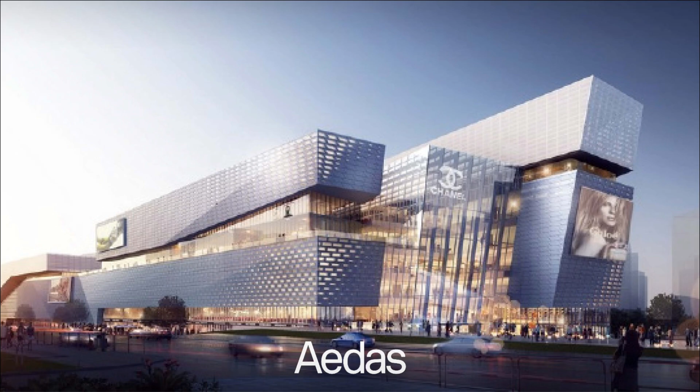I became sort of like the grasshopper guy on the team. I was always designing these facades and things like that. And it's really where I started to pick up technology when I was working in practice as a designer.

These things would get built really quickly, basically from the renders. So you'd be halfway through the project and they're actually building it. It's a very, very intense working environment.

I then got to a point where I was like, I'm designing these facades, but I don't know how they're actually made. And I joined a company called Front, also in Hong Kong, and eventually transitioned to their New York office. So I transitioned from Hong Kong to New York.

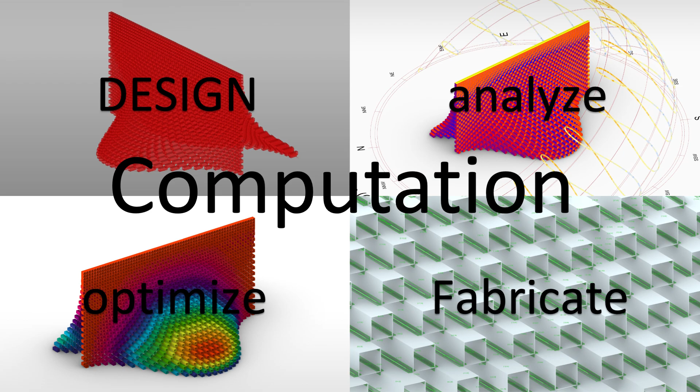Computation is, of course, incredibly important at BIG and in many architecture firms, from designing to analyzing your project to quantify that your design is actually performing, optimizing it. Sometimes, what if you take the Serpentine and you can only have 10 box lengths? And sometimes fabricate - it's not often, but sometimes as architects we would fabricate stuff.

We were also dealing with the immersive side, playing with game engines like Unreal, as well as the rise of real-time rendering and eventually D5 and things like that.

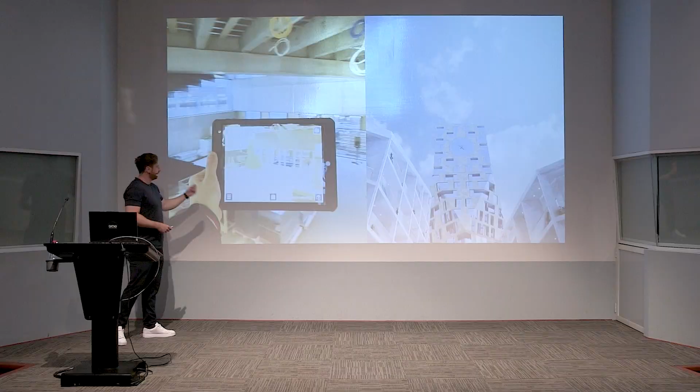Another area that I was really pushing was immersive design. So on the left, you got augmented reality, on the right, virtual reality. These were early experiments, which then evolved into real-world practice. So this is actually the headquarters in Copenhagen when it was being built, and we were using it to project what it's going to look like. And on the right was us presenting in virtual reality during COVID.

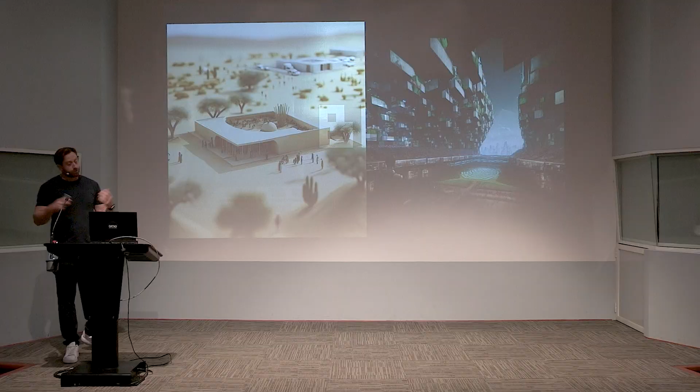And of course, the other big thing that I was spearheading at BIG was the rise of AI and this whole explosion of image generation and video and text and all this kind of stuff. As you can see, these images are super old. And so very quickly, we're experimenting with how do we integrate this into the actual design practice.

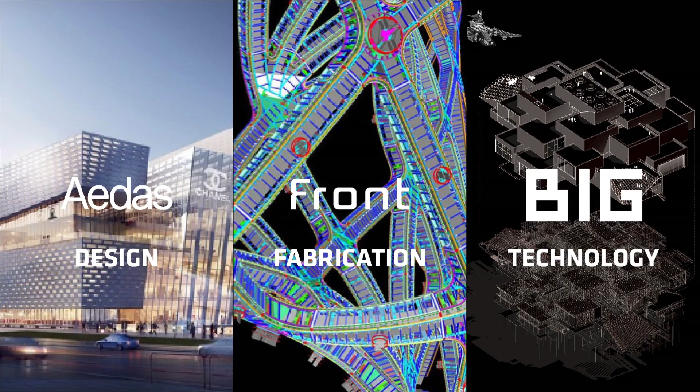So my professional background was this: I've always worked as an architect at these 3 different firms, but I always focused on a specialty, either as a designer, fabricating stuff, or as a technology specialist. Technology was always the core part of my career and my specialty, and also helped me get into some of these firms because I had a little technology superpower of some kind that helped me work as a specialist or get into different firms.

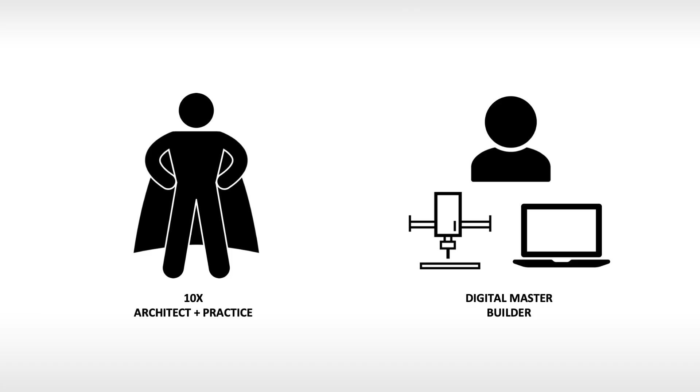And my background led me to these 2 interests I have right now. One is the idea of the 10x architect - you as young architects that are good designers, but also fluent in technology, can become significantly more productive than an architect that is not utilizing technology. I think we already have seen this in the early days from drafting to CAD, and now this is exploding as we transition from CAD to the AI collaborative era.

And the other area is this idea of the digital master builder. Because of technology, we as architects can get back to making. You guys probably have all used the laser cutter or the 3D printer to make models. Well, you can scale that up, and you can 3D print entire buildings now. Instead of laser cutting, you can CNC plywood out of wood and actually build houses with it. So you as architects can get back to being the full master builder from design to actual construction.

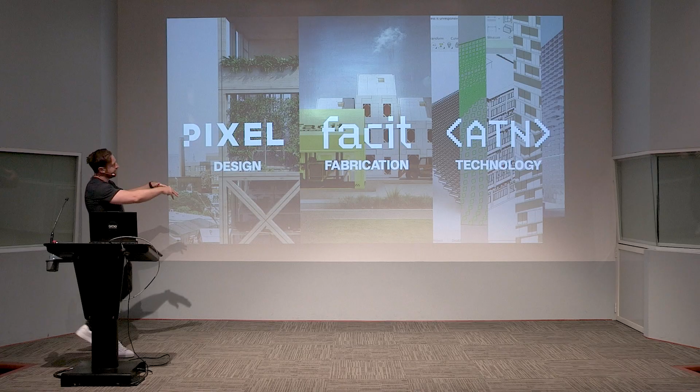Which means, one, you have more control of design, but two, you can actually make more money because you're doing the whole thing. The second part of my career is what I call the more entrepreneurial side, where I started to found my own businesses or work for startups. Pixel is an architecture practice I set up. Facit is a house building company, a startup I joined. And ATN is my online business where I teach people around technology. So again, there's always been this link between design, making, and technology or education.

So Pixel, I started a few years ago now, back in 2018. Notice I started Pixel whilst working at these companies. Sometimes starting little businesses, if you can do it with their permission, is important, can be a great way to start a business because you actually have the security of having a job, but you have the freedom to experiment with doing competitions or taking on little projects on the side. So a lot of people say this idea that you just quit your job and start a company. Most of the time, people that do that, it doesn't work because you suddenly have no money, and you have to quickly work out how to make the business work. So definitely creating something whilst you're working can be a really good strategy.

Pixel was an architecture practice. It was just me and my friends working on competitions. We got close to winning some.

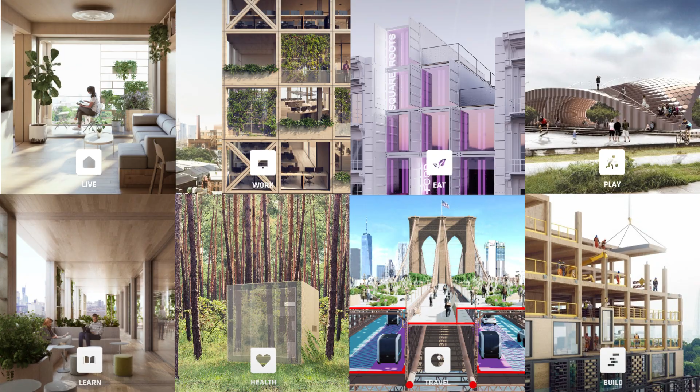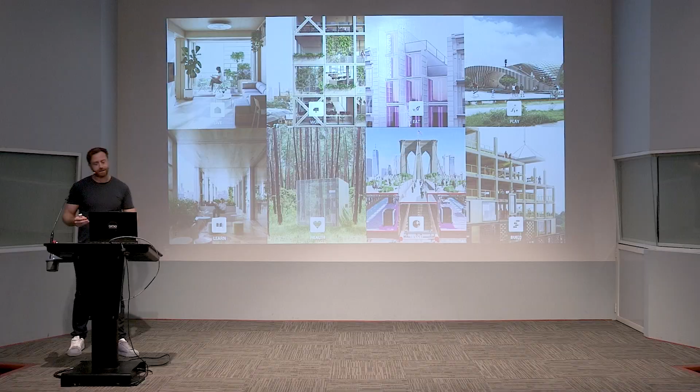We landed some real projects and real clients, and we kept doing these projects over and over. We had a real interest in working on projects that positively impacted the future. So instead of thinking of it like retail or commercial or office, we think about how we can improve live, work, eat, play, building, learning through architecture. We worked on all these different competitions, from office buildings to taking projects to Burning Man to housing, train stations—whatever competition we could find that was interesting and felt like it fit, we would work on.

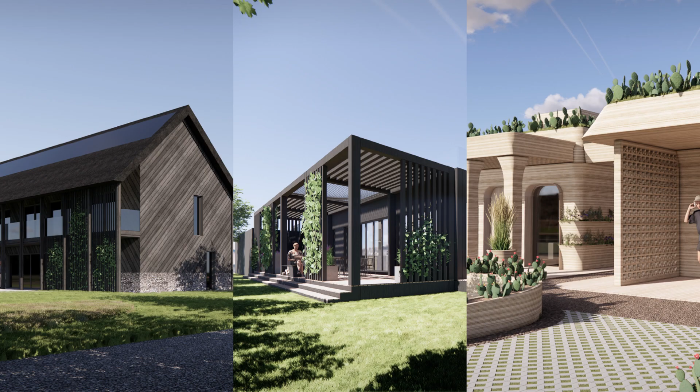This led me to start honing in on the world of housing. I found there was loads of opportunity to create sustainable housing using technology that actually increases our way of life rather than decreasing it.

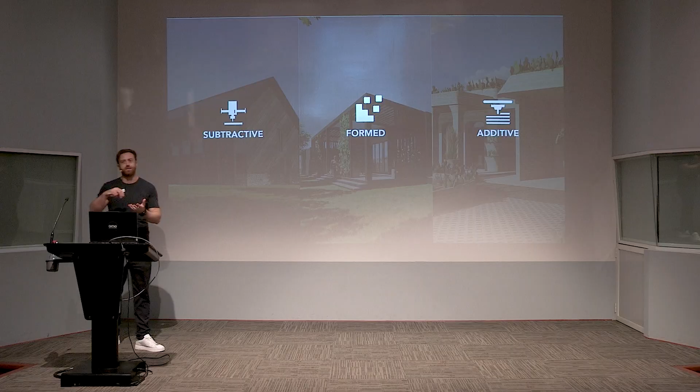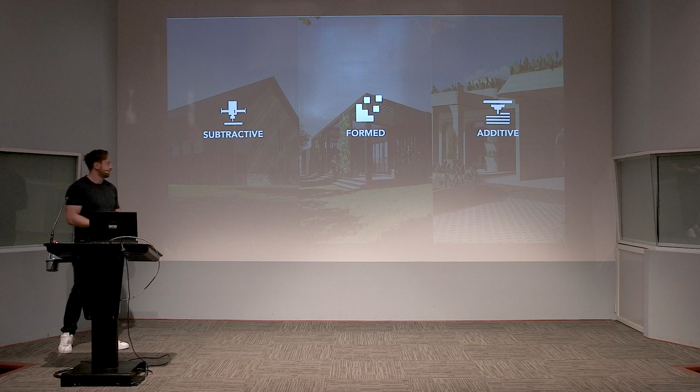So I started to gravitate towards what's called MMC, modern methods of construction—essentially new ways that we can build. You can think of those in categories of subtractive, formed, and additive. Subtractive is when you take a material and use a robot or a CNC machine, some piece of technology you can control, like a CNC machine and plywood. Formed is when you cut the material away and use it to create forms of concrete—so precast concrete. Here in Guatemala, you have a lot of concrete. Or additive, which is where you 3D print entire structures.

And so we started to work on projects like this. This was where we were designing a kind of prefabricated building system in the UK that could be repeatable, yet adapt to the different areas, because we have very different styles of houses in different areas of the UK. These houses are all built from timber.

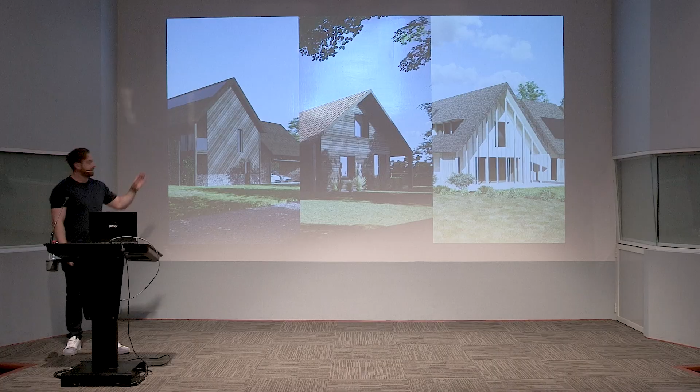They're also made from hemp, which is like a weed plant. It doesn't get you high, but it absorbs CO2 very quickly, and you can actually use it. So with all the houses, we're trying to use local or bio-based materials.

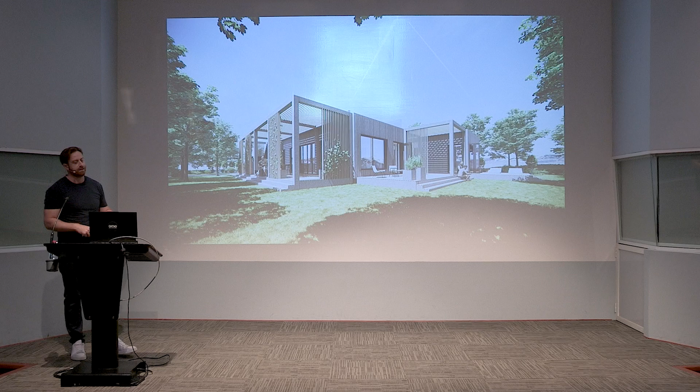Another project we worked on was a modular precast system in Bulgaria, where they had quite an ugly building system, but through the use of parametrics, we could create a building configurator. Using a very small number of parts, we could create a house that could take many, many different forms, so that the families inside it can design the houses around them, and not the other way around.

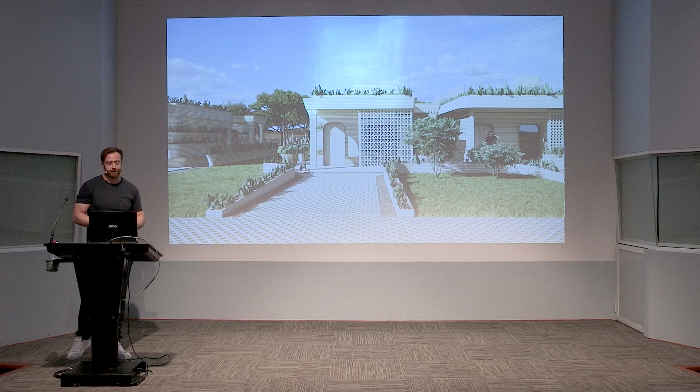Finally, we also worked on competitions with Icon, a 3D printing company based in Texas, to build a house for $99,000. Of course, the beauty with 3D printing is every single house can be unique. So it was again the idea of what if the users themselves can actually create their own house—a bit like everyone's played Sims and created their own house in Sims.

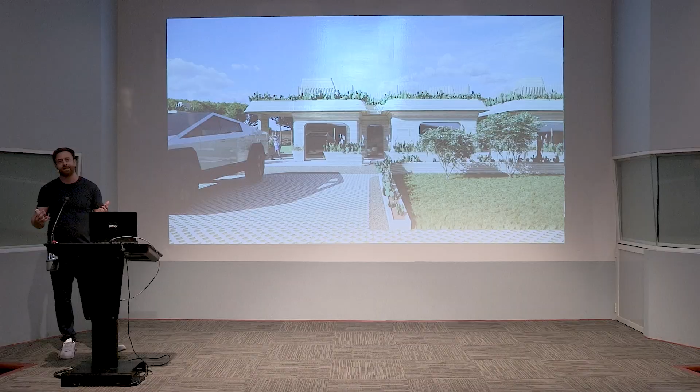Maybe you guys are too young to play Sims, I'm not sure, but everyone has played Sims and wants to design their own house. So this is the idea of what if you can actually configure your own house.

This interest in housing and using technology to build houses led me to join a startup company called Facit, where we were trying to become a tech-enabled home builder. Facit is quite a unique company. I joined them not so long ago, about a year and a half ago, in 2024. I left BIG and joined Facit.

Essentially, they're a company that rethinks how we build homes. So we think of homes as a product, a bit like your phone here. Your iPhone or your phone that you have in your pocket is a product, and every year they release a new one, and it gets better and better, supposedly, with iPhones. So we also want to think of the house like a product, right?

But not a product where you just copy and paste the same house over and over again—rather, the house is made up of the same parts over and over again. So the same foundations, the same roofing, windows, doors, all tied together in what's called the Facit chassis, which is the timber superstructure that we build from a CNC machine out of these little Lego blocks.

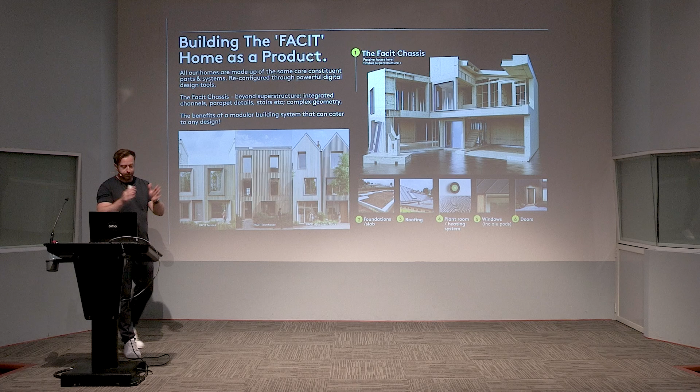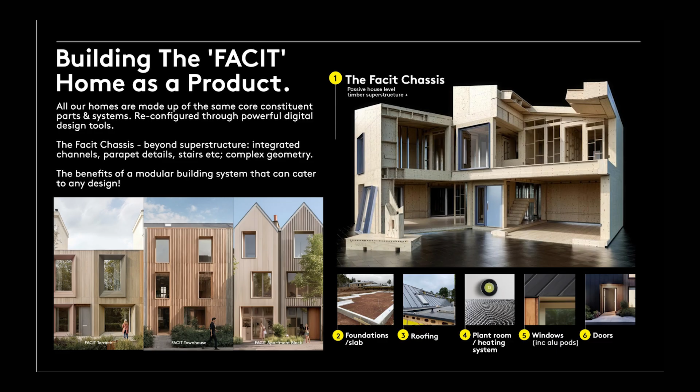So we cut plywood, and then we build them into boxes, and then we build the houses out of these basically little Lego boxes. It means every single house can be unique, but it's made using the same system. So you know how it's going to get built, you know how it's going to get costed, and you have freedom as a designer, but you have the efficiencies of a modular house. Of course, we also modeled the house down to the nuts and bolts in BIM, and that way we know exactly how many sheets of plywood it would take.

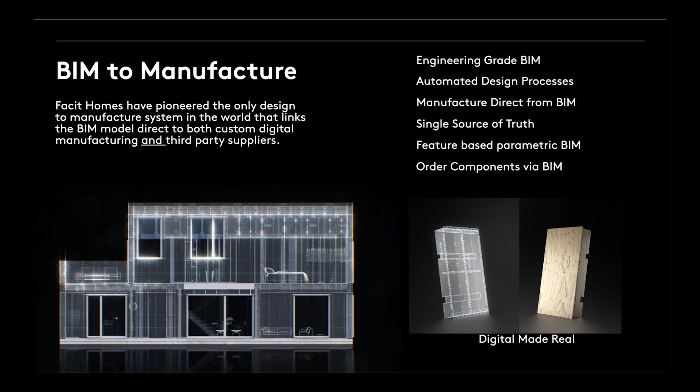We would know exactly how many bolts are in the building, which means we could actually cost the house to a very, very high accuracy. You guys may be unfamiliar with this, but when you go and design a building, you don't really know how much it's going to cost until you've basically finished it, right? Which is kind of crazy. But with Facit, we know exactly how much it's going to get built.

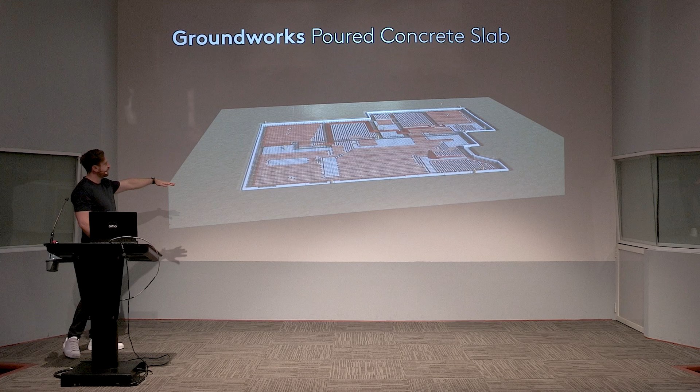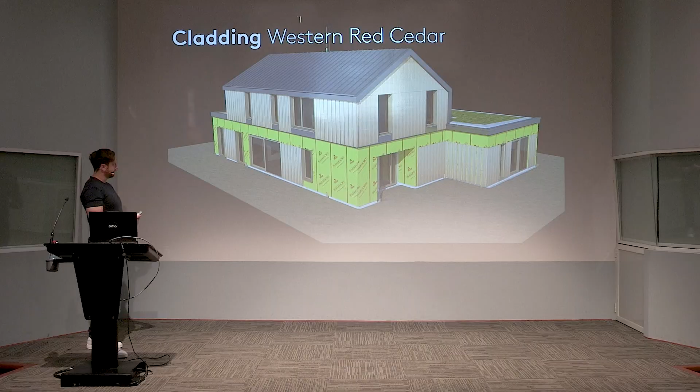This is basically the way that we built. We had a modular building system. Even the foundations are modular. We use a little bit of concrete. All the little Lego blocks of plywood come into place, and we can make any shape of home. The waterproofing goes in, the windows that we use every single time goes in, and essentially the cladding can be anything in the local area so we can fit in.

And with this methodology, we could build the most sustainable homes in the UK. We could build faster than traditional construction, and often we would build cheaper than a traditional builder building to the same level of specification.

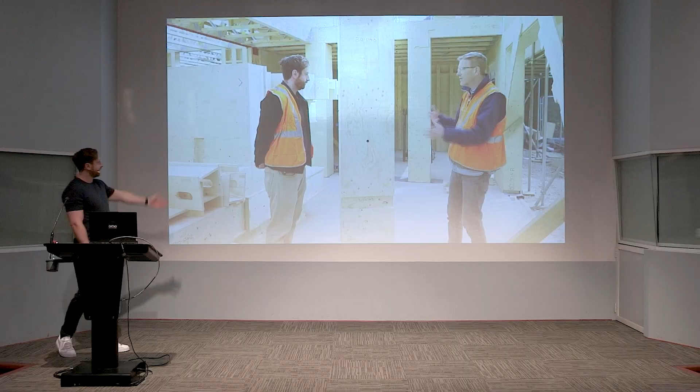And so we were also a true master builder - we were architects that were designing, manufacturing, and building. Our design process would start as a sketch. We'd design it, model it in Revit, demolish the building, do the foundations, cut out the pieces, and actually build it block by block to the end. You can actually go and check out the YouTube channel where you can go through the entire process of the building.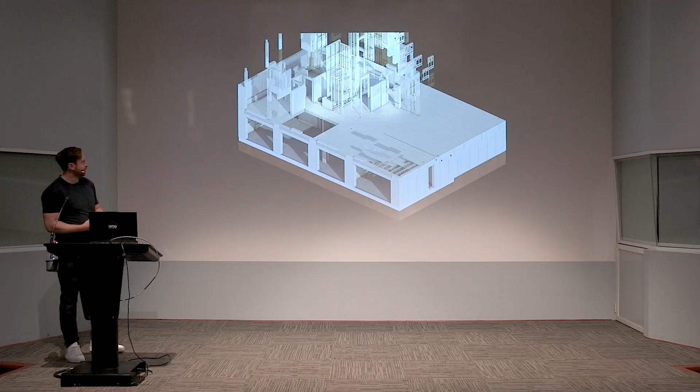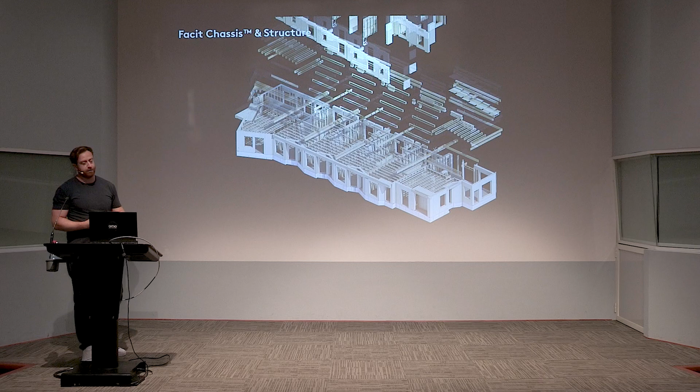Essentially, I joined to help them scale up this idea from single houses. So the company for many years had been building houses just for single, expensive eco-homes, and developed the technology which we were then scaling up to deliver and tackle housing on a much larger scale - going from single houses to multi-unit schemes. In the UK that's like little townhouses, apartment blocks, where we can really deliver housing to a much larger scale. So it's the same building system, the same methodology, the same technology, but just applied on a much bigger scale.

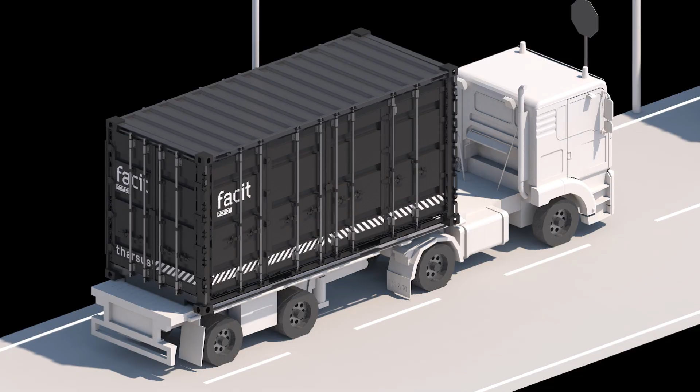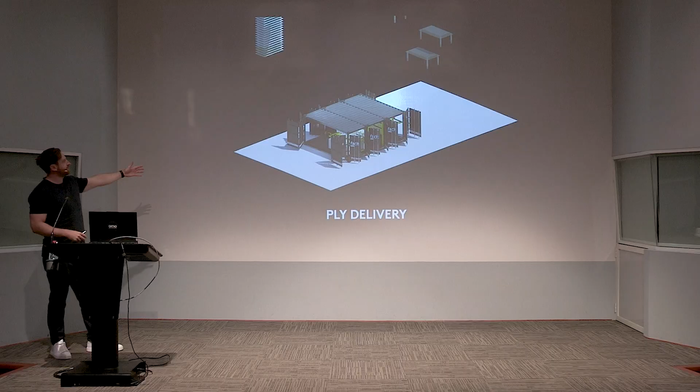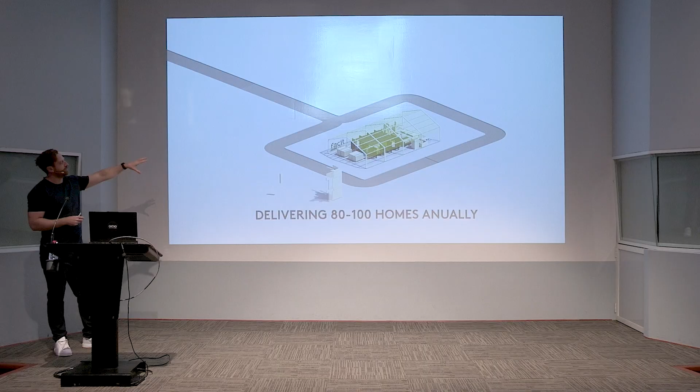We also developed a new microfactory. So instead of one container, we developed a 3-container system. Same idea though - materials go in one side, they go through the more automated machine, out comes the components, which you can put into the Lego blocks, and then you can also join the Lego blocks into entire walls or floors and assemble the building really quickly. The key advantage we had is we can fit our microfactories on the building site, so you don't have to pay for another factory. You can bring it with you and build directly on the construction site.

This was the new machine. In the middle is still the CNC machine, but we made all this automation around it. We had robots that would put the materials on, a 2D print system so we can actually put instructions on the components, the CNC machine still in the middle, and then a material loading and unloading system, so that the machine can basically run without people overnight, and you can come in and start making the components.

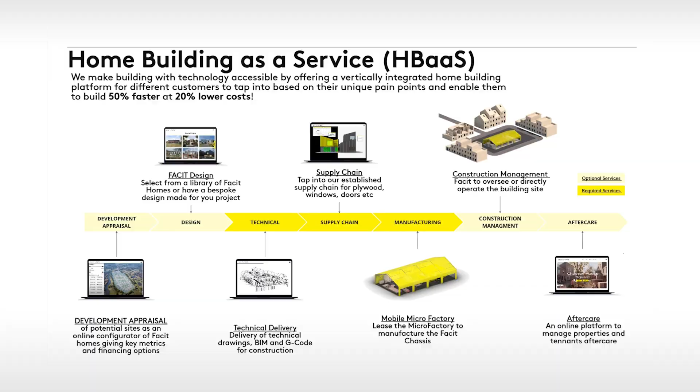And so we were basically offering a new model for housing called home building as a service, where we would offer developers an entire end-to-end process from looking at the initial development, doing the design, building it, and even helping them sell the homes. Our goal was to build houses like this, which were beautiful, fit into the local context, but highly sustainable and highly performative, right?

So this is really high quality, sustainable living in the UK. And then finally, Architect Network, which I started around 5 years ago, again whilst I was working at BIG. This was something that started off small and grew from there.

We're a platform that really talks about architecture and technology, and our goal is to share knowledge around this topic. We started it because even working at BIG, we would see graduates come in and still need a little bit of training, whether it's BIM or Rhino or computation. So I just started to make the same material I would use to train people inside BIG, and make it publicly accessible on YouTube or through our website.

And we share knowledge in 4 key ways. We have a podcast, our YouTube channel, online courses, and events.

Our podcast started really small on an app called Clubhouse. You may remember that from COVID. It was a pretty wild app. It's grown into a more YouTube-style podcast where we invite guests to talk about some kind of architecture and technology. I think you guys know Oliver and Stephen from last year. It's a very small world that we all know each other.

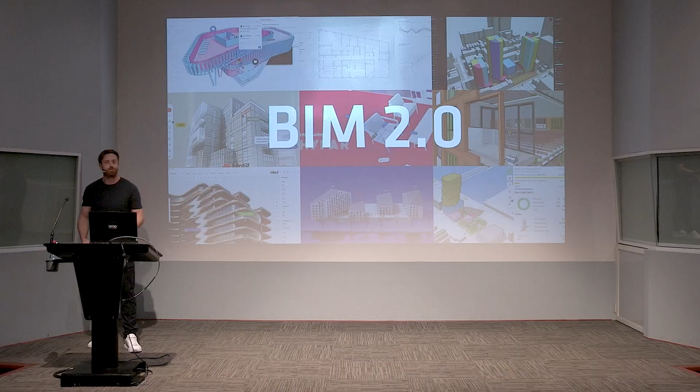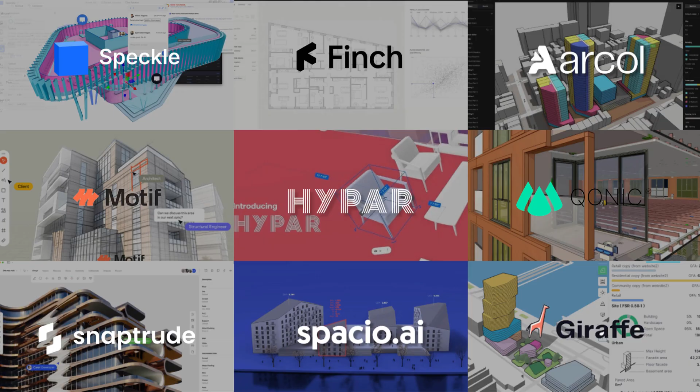And we as architects are demanding a newer platform, a better generation of BIM. And so from that, all these startups emerged. And now there's more than 9 companies, actually 10 or 15 now, all kind of reinventing BIM in this new era of a platform.

If you look at other industries like product design, they typically have one software where they design, document, even manufacture from, and visualize all in one software. This is sort of what these guys are trying to do. They're all little babies at the moment, but they might grow into something quite big. So I wouldn't necessarily recommend learning these right now, but it's worth following them and seeing how they develop.

One of these will become the next Revit. Some will die, some will join together. But yeah, at the moment, all of them are either trying to be broad, trying to be the next Revit, like one platform where you design in this space, or they're trying to be narrow, trying to do a specific thing, like just floor plan automations or floor plan layouts.

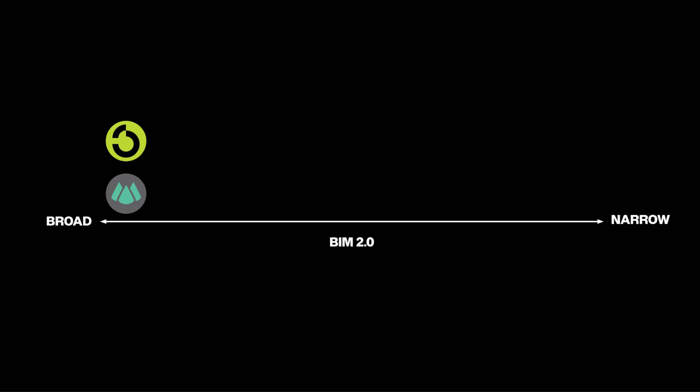So at the broad end of the spectrum, you've got a company called Qonic, also called the Open BIM company. Qonic is basically a platform where you can load the whole city, even your model, all the way down to the nuts and bolts. It's much more intuitive, a bit more like SketchUp in terms of modeling. You can model an entire building and zoom in all the way to the little sprinkler, and zoom out to the entire city.

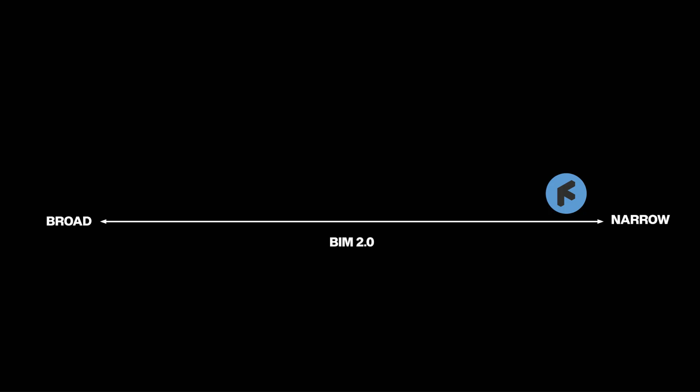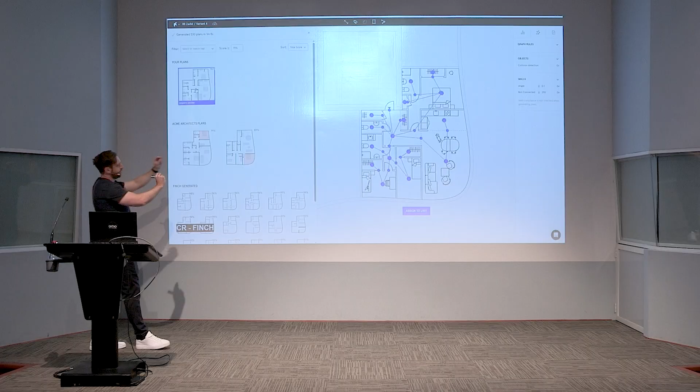Another that's more narrow, doing a very specific job, is called Finch. Finch is trying to use computation and AI to automate laying out plans. It actually learns from your plans in different ways, and can feed you initial designs, then you give it back your own designs. It starts to learn, and can produce pretty good layouts for apartments and things like that pretty quickly. It uses a system called graph mapping, basically an algorithm that measures the distance between different rooms and works out the connections between them.

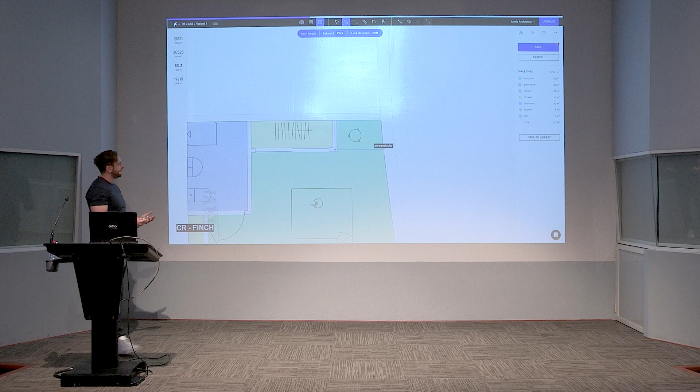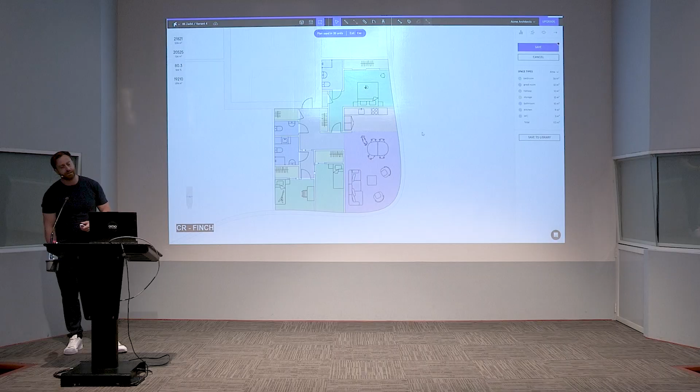It's basically like a plugin where you can generate it, but you can also customize it and add manual touches to things. This is really important because this idea that the computer will just generate something for you is kind of false. We always want to be designing with the computer, not the computer designing for us.

Next we've got a group here, Snaptrude, Arcol, and Giraffe, that want to get to that broad platform, but they're initially focusing on feasibility, the very early stages. So you have a site, you quickly put a building on it, you put program on it. You can even have this little chatbot AI thing that helps you go through the program and work out areas, and helps you model a little bit. It's much more intuitive, and it's also on the web, so you access this on the internet.

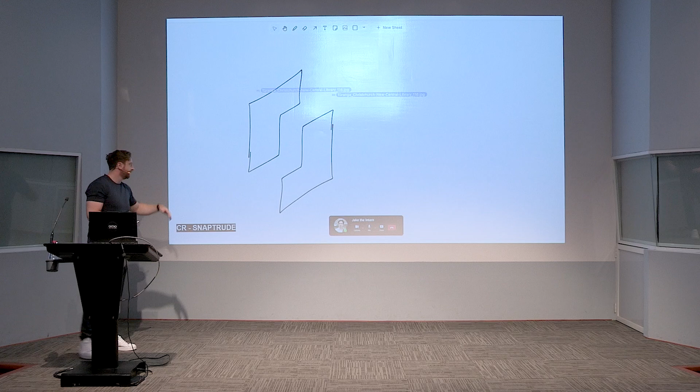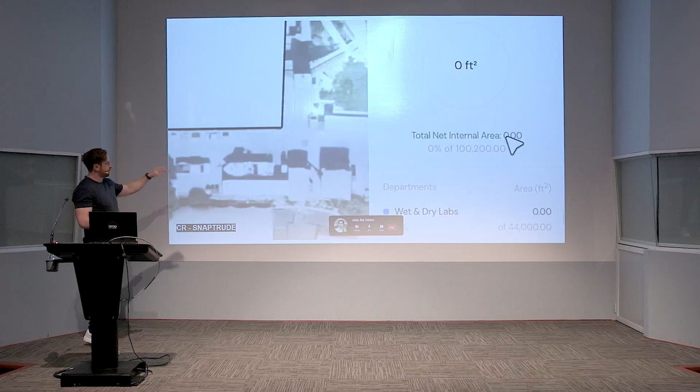You can go all the way from drawing to actually modeling a full project. It's also kind of very Miro inspired, so everyone is working in one environment at the same time, and you can go from site, and it can do all the program for you and model extremely quickly.

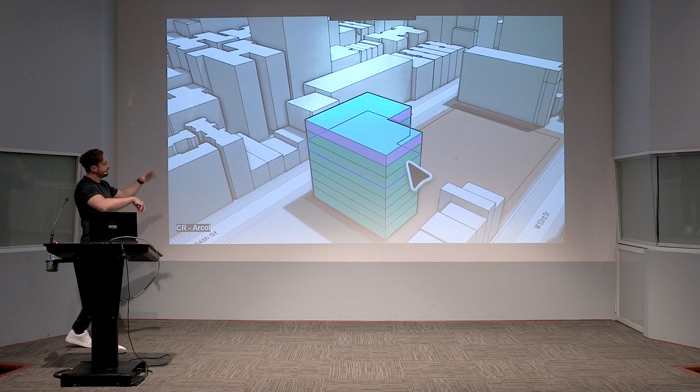Arcol is another one that's also quite similar. You can model a mass, give it different programs, and then very quickly go from the model to putting it onto sheets where you can present something to the client. All of these are trying to get that really early stage really quickly. Giraffe is another one where you go online, find your site, quickly draw what you want to do, and it's basically using a bunch of Grasshopper scripts in the background to help you get there a lot faster.

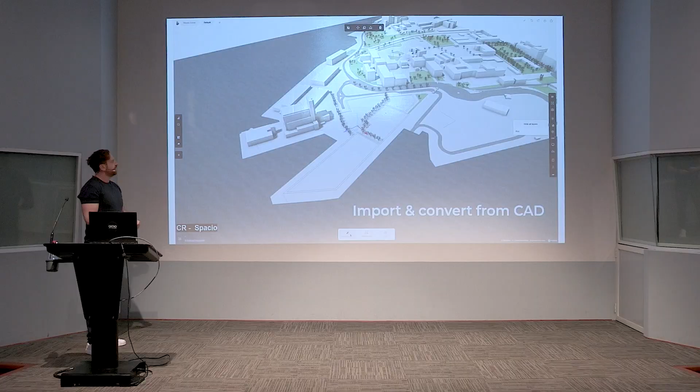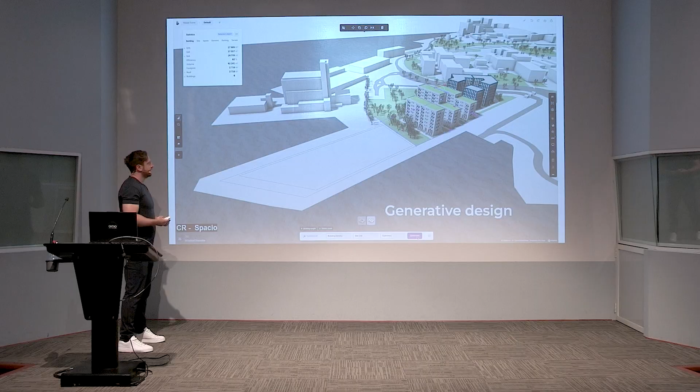Then the next ones are kind of along this spectrum, all somewhere here, but trying to get to become a broad platform. Spacio is a new one as well, probably the most beautiful one, where again you find a site, you can analyze it really quickly, generate an initial design, and quickly work out how much massing you can put on your building.

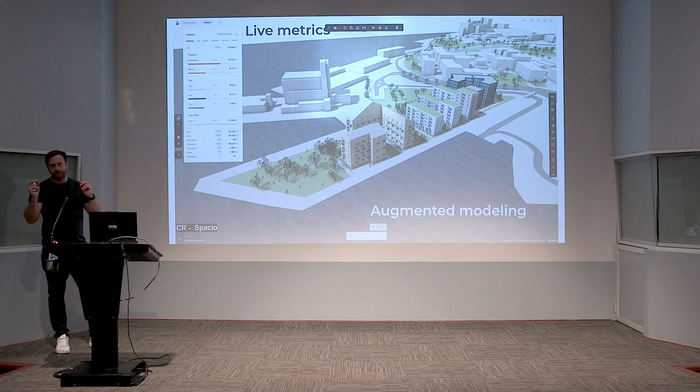It's a bit more beautiful in terms of the design as well. It generates something, but you can also manually edit it, and create your own scripts to create your own buildings. Again, it's very early stage, maybe working with the developer to know exactly what you can fit on your site.

Of course, Autodesk have their own products. This is called Forma, where again they are trying to create their own version of this, where you go on the sites, generate your own massing model, do environmental performance, give a massing and quickly analyze daylight analysis, zoning, wind analysis, and all this kind of stuff.

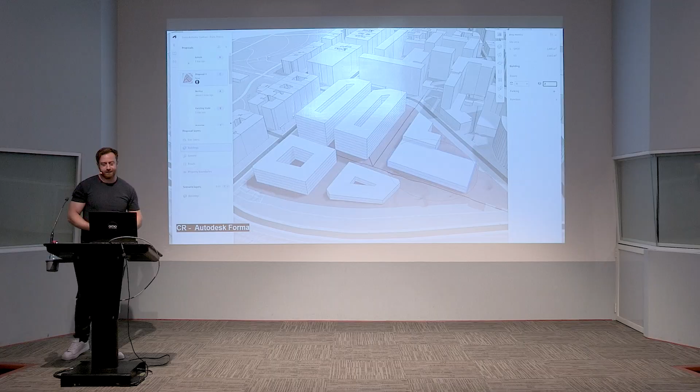And this is free, so if you have an Autodesk license, you can test this out today. As students, you should have this and you can try it out.

Motif, this is one of the big new ones. They have a lot of funding from Silicon Valley, and essentially right now they're trying to build the Miro for the architecture space. So you guys can all be in one space, referencing your BIM model, creating images, using AI to render it, collaborate together, make presentations. And this will eventually grow into a platform where you can actually model in the cloud, online, and work on things in a much smoother way.

And then finally, you've also got one called Hypar, which is a bit more narrow, and they're specifically trying to do floor plan layout or floor plan generation. So you can quickly go from modeling rooms to putting your whole building together really quickly. It's very good at automating space planning layouts, for conference rooms and all this kind of stuff.

So there's all these companies now trying to create the next generation of BIM. It's all quite interesting, it's all quite exciting, but it's all quite new. As students, I wouldn't say you have to learn any of these softwares, it's too early, but it's definitely worth knowing that they exist and following them.

And this is called the BIM 2.0 era. A few thoughts on where this is going: first of all, BIM 2.0 is really hard, it's really expensive to do this. So these are little babies that will take time to grow into the next Revit.

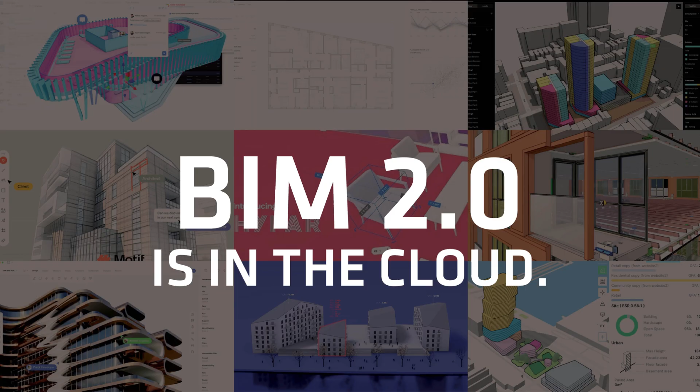All of these are in the cloud, so it's like working in Google Sheets or Miro. Everyone is working on the same thing, hence why it's extremely collaborative—you're all working on the same project at the same time, can see your colleagues moving things. There is an obsession with becoming the next Figma or Miro of the AEC space, where everyone is collaborating in the cloud.

And it's all integrated with AI, so all of them are using AI in some way, even as a little sidekick or trying to generate the entire building. If you want to find out more, you can see on our YouTube channel, there's a whole video on BIM 2.0.

And the other thing that's really hot right now is, of course, AI. How many of you guys are using AI in some way—image generation or ChatGPT? Put your hands. Good, you should definitely be embracing the world of AI.

We're in a really exciting time, there's been this rise of AI. I started this a while ago when I was at BIG, when it first came around, and it's a way of looking all the way from the beginning of a project to documentation—a simplified design process of what AI can really significantly do or significantly help us with in the design process.

So at the beginning, you could give ChatGPT your brief, you could dissect the program, you could get it to come up with your idea and narrative really quickly. You could then use that to create a prompt for the image, or generate the prompt directly, and sell the idea of the project. You could turn that into a video to sell the story of a project and sell that to a client.

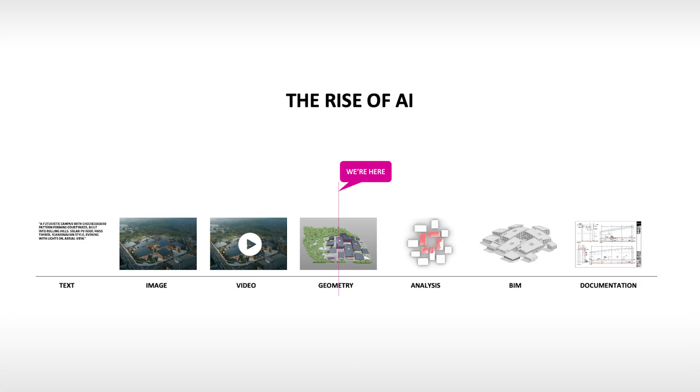The way I see architects using AI when we go around to all these different firms and in the industry is split into two sides. One is the process side, using LLMs like ChatGPT or Claude or Grok to streamline the more boring side of what we do—that could be as simple as using ChatGPT to reply to emails, or generating reports that you needed to do.

And it's really about simplifying the boring stuff so we can spend more time actually designing and making the project better. The other side is, of course, the creative side, the side of image generation, video generation, and the more fun, playful stuff.

In terms of LLMs, like ChatGPT, all firms are now building their own trained LLMs in their specific area. So Foster's and Partners have their own one, Heatherwick, Zaha, Big. It's simply just a way to create a repository of all the data inside that office - like how many hotels have we designed, what's the standard GFA for an office building that we've designed. It's really about having a place where you can access all the knowledge of the firm.

Image generation - there are of course many people using different image generators, but I still see Midjourney as the place where people go to create the initial idea for architects. It's still the most creative, the most high-end, at least for creating the essence of the idea. And it's become quite powerful as a way to quickly hone in on the design with a client, so you can very quickly feel out what the client is looking for by giving them these little flavors of the direction we could go in. It's really saving time on dead design options that you think won't necessarily work.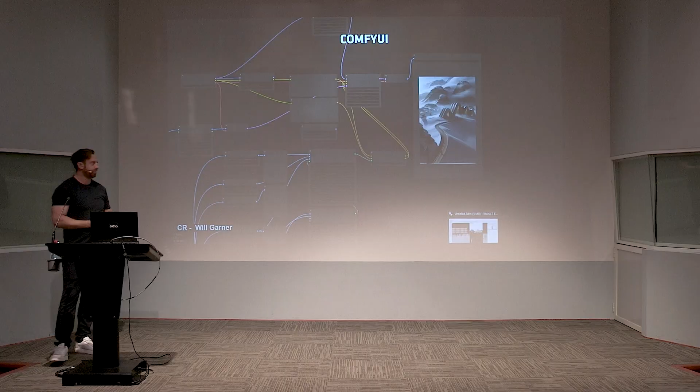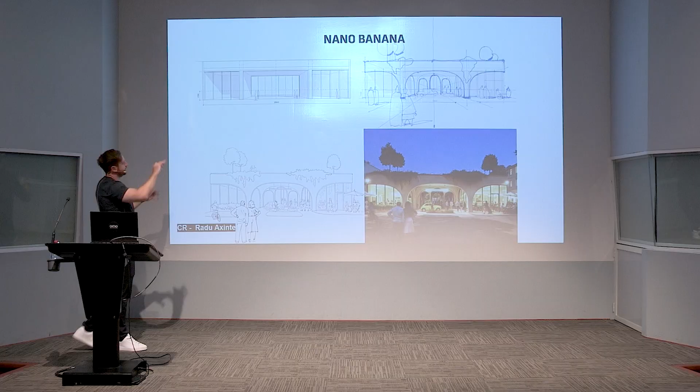And more recently, this has also evolved with Nano Banana - a product from Google. If you go on Google's Gemini, you can directly use Nano Banana. You can see architects - each one of these pieces of work is referencing an architect, with their name in the bottom left corner. Radu is actually from Heatherwick Studio, and this is a really beautiful example of the power of AI. He's created a model, so he's got an actual reference for the space, so it's accurate.

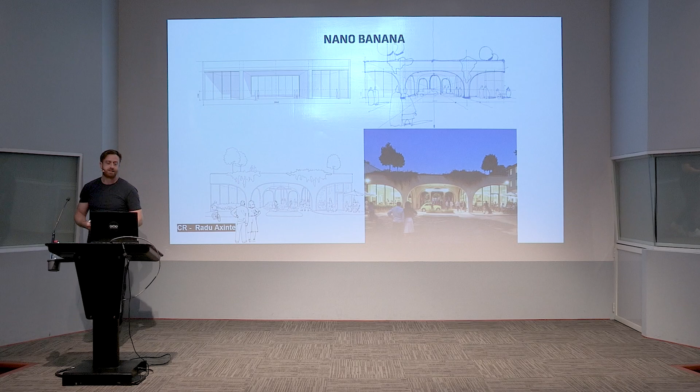Sketching over it - sketching is becoming a really powerful skill, because from a sketch you can create the outline, and then use the outline to create a high-end render. I think this is where it's getting really exciting. Bringing back hand drawing allows you to go from concept to render extremely quickly now, so you can spend more time thinking through the actual idea.

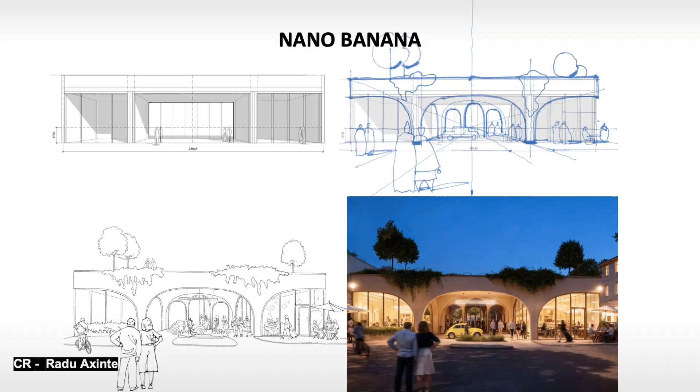Another architect called Tim Fu - they are actually using text to video to create fully animated videos to sell their ideas. A lot of small architecture studios are now offering visualization services using AI, and through video, they're really able to sell the entire story and also sell a new service. So instead of going to a rendering company, you can now go to your architecture firm.

This explosion in AI imagery and video has also given rise to an explosion in social media. I think the one place we have seen AI disrupt the industry is actually in social media, because before, if you had to create projects to put on Instagram, you're supposed to post every single day to grow. But that's very hard when you're designing - if you design a project, create a render, even if you're very fast, it would take weeks or months. Now with AI, that takes hours or days. So suddenly architects could just feed Instagram with loads of images, and there's this explosion in online architects and architecture profiles, which means you could market your ideas much faster.

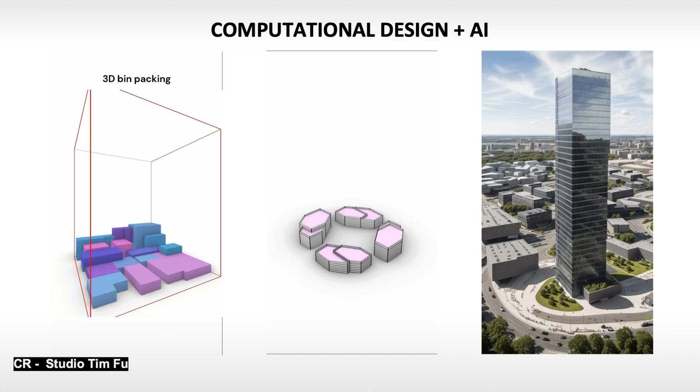Again, from Studio Tim Fu, there's people combining computational design with AI. But don't get this confused—this is not AI writing the scripts. The scripts are just Grasshopper scripts. All AI does is visualize using AI, so the process from concept to the actual end image is just getting much shorter. But you still have that combination of computational skill and AI skill.

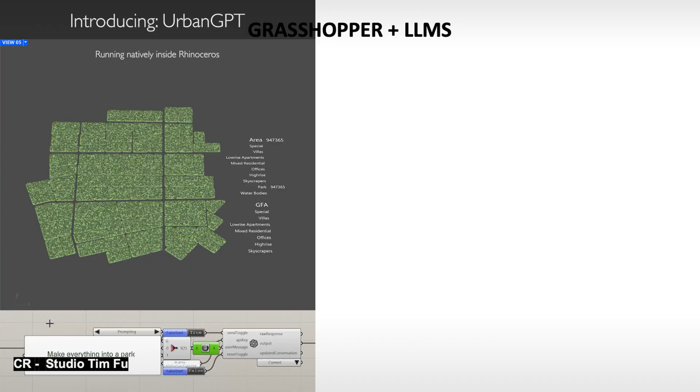I think where it's getting really exciting now is when Tim's been combining the world of Rhino and Grasshopper with ChatGPT or DeepSeek, and you can actually connect it to our tools and just speak to it in plain English. I want a master plan with this much green space and this many towers, and it's starting to control the actual design tools themselves. This is where I think it's getting really, really exciting.

Of course, this has given rise to all these different plugins. There's thousands of AI plugins, and I think we are in this AI bubble that will burst soon. But somewhere in here are the next big tools, and many will die, but the next ones will be there.

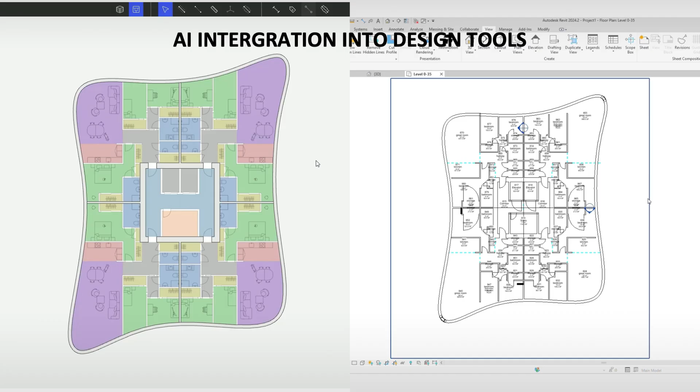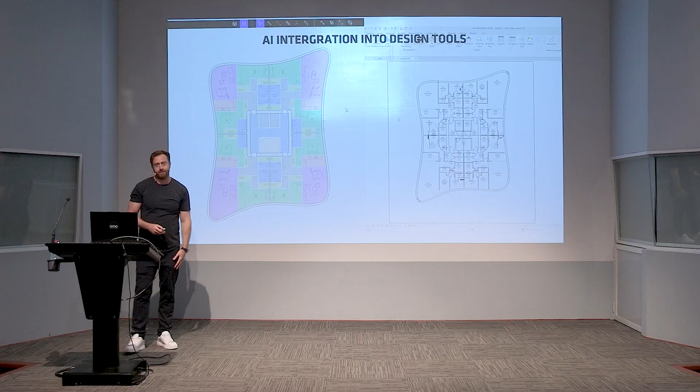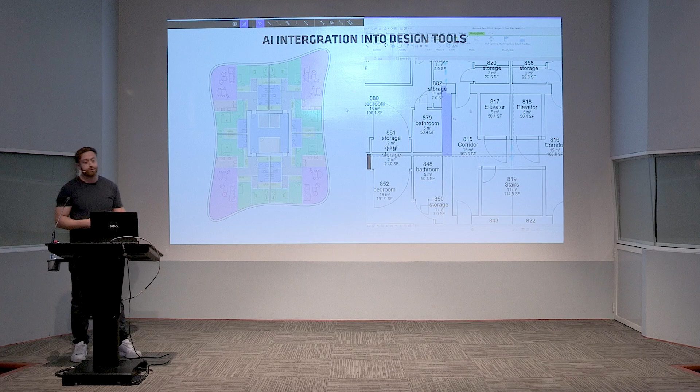We're already seeing AI becoming more and more integrated into our design tools. Finch, the one I was talking about before, can actually generate the plans and automatically import into Revit, and then you can go and manually edit it. So through the use of AI, working with both human and artificial intelligence, you're able to speed up that process from design to actually making things.

The new things happening right now are these AI tools getting integrated with our design tools like Rhino. The way they are integrating is what's called an MCP—think of it a little bit like Google Translate. ChatGPT can speak a very general language, but it doesn't know the specific language of Rhino. MCP is sort of like a translation device where it can talk to Rhino in the language of Rhino, or in this case, Revit. So now you're able to just talk to your design tools in plain English, and it will actually create models and stuff like that.

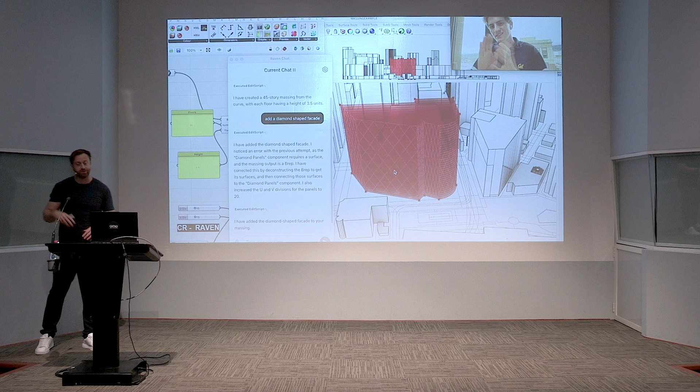I think this one's really exciting—it's called Raven, where you just talk to it in English and it generates Grasshopper scripts for you, and it will even fix its own scripts. This is a really interesting one. It's super early, these guys are just two people building this, but it's a really exciting future of where they're actually going.

A final one is called RunChat, where these are kind of new platforms that are a little bit like its own Grasshopper for AI. It's a plugin to Rhino. You can open it up, bring an image from Rhino—I'll just fast forward a little bit—grab an image from Rhino and then turn it into a render. You can then turn it into a video.

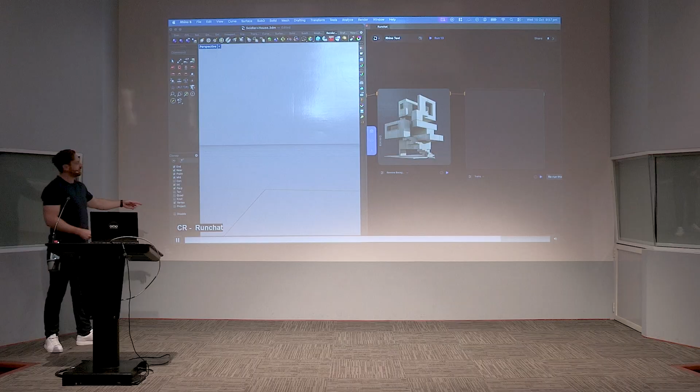You can also go further down the line, where you can actually reverse that process and go from an image, turn that image into a 3D model, and import it back into Rhino. So now you can go from image to 3D and reverse that—from 3D to image to render to video. This accesses all of those different models like Google or Midjourney. I think this is going to be the future of how you integrate it with the design tools.

So my thoughts—will AI disrupt the industry? Yes, absolutely. But at the same time, it hasn't disrupted the industry as much as we thought. I don't go into firms and they're suddenly designing in completely different ways. They're designing in the same way they did before, just using AI to speed up little parts of the design process. So instead of spending one week rendering the project, they're now spending an afternoon, which means they can explore more designs and spend less time working through how to actually render the project out.

Will AI improve design? To be honest, I haven't seen designs I've never seen before. AI is not creating designs. I think in the parametric era, we did see designs we'd never seen before, but now I think we're just seeing more designs. And sadly, I think the quality is actually decreasing, because we're generating these things so fast.

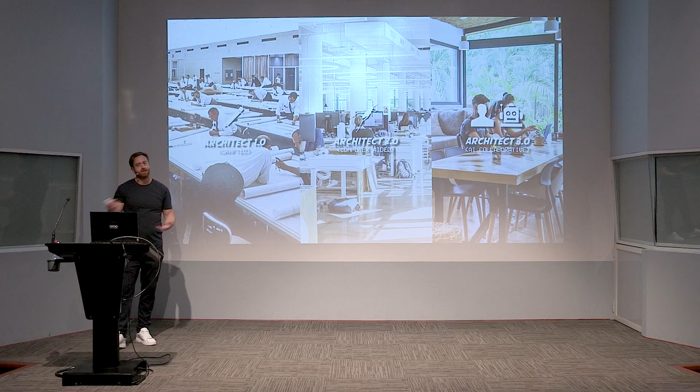And hopefully they're in much better environments. All of this era is in major cities like London, Hong Kong, New York, which is really expensive to live in. I've just been to Antigua, maybe you open up an office in Antigua where you have a much better work-life balance, work remotely and be online because now you can connect to clients online. You don't necessarily need to be in these major cities. So maybe you guys here can set this trend because you don't need to be in major cities spending tons of money on rent and all this kind of stuff.

So these are the two things that are going on in the industry. I just want to give you an overview of what's going on. As for me, I'm now working full-time on ATN. I'm a full-time influencer now, which is a bit weird at this age. I didn't expect to be a full-time YouTuber now, but this is how it goes. I'm also an entrepreneur, I'm also an architect, so I've been a little bit confused on what to call myself when I introduce myself. I'm kind of thinking of an archipreneur. I think I kind of like this, this idea of reconnecting with building and making and being more than just a designer.

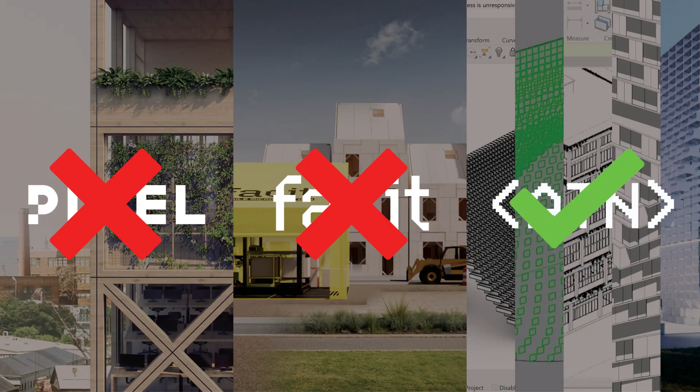And finally, I thought I'd give you my advice, some of the things I've learned over this time. One, this is hard work. I don't want this presentation to look super smooth and polished, this is a lot of hard work to do all these things, it's not easy. I think get comfortable with failure, things don't go to plan all the time, things go wrong. Out of all of these 3 companies, Pixel is basically frozen, unfortunately Facit is dead because the housing space in the UK is really quiet, ATN is going well, but businesses don't always go to plan.

Don't give up though, if you have an idea or a dream, don't give up on it. For example, when I applied to BIG, I got rejected 4 times, I think, at least, over my career, and then finally got in on the 5th time. Particularly for you guys as new graduates, I know it's really hard applying to all these different places, and you guys also have visas to deal with. I also had that problem when I was in the UK and applying to the US and all this kind of stuff. It is difficult, it's not impossible, don't give up. Just because a firm said no this time, go continue to improve your skills, and maybe they'll come back another time. So don't give up just because they said no the first time.

Networking is super key, meeting people. I'm here today, you now have a connection to me. Message me on LinkedIn, hey I'm looking for a job, blah blah blah, right? Don't message me too many times, but I try and reply to all messages.

For me, I went to a conference in 2014, and going to that conference completely changed my career. I met the people that got me the job at Front. I also met the people that recommended me at BIG, and I worked with some of these people on projects with Pixel. Even today at ATN, a lot of these people now run firms, and I'm collaborating with them. So by going to one conference, all of the rest of my career basically spanned from this tree, because I was interested in computational design and there wasn't that many places to learn it.